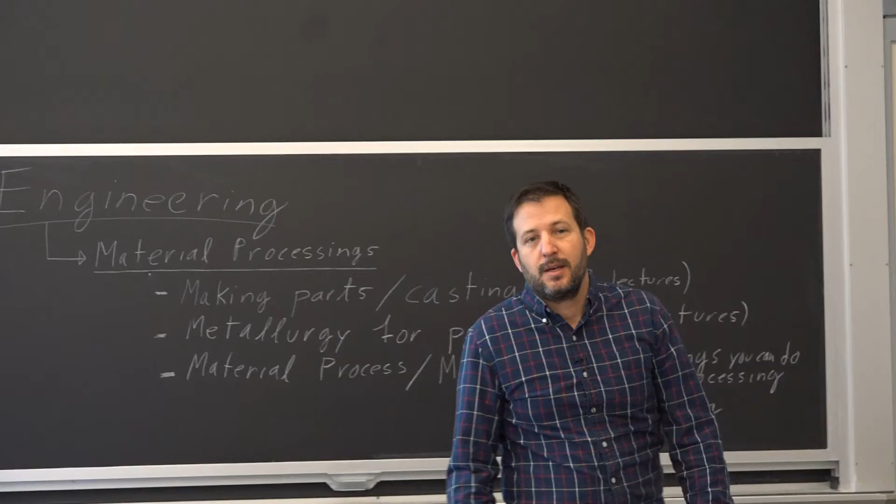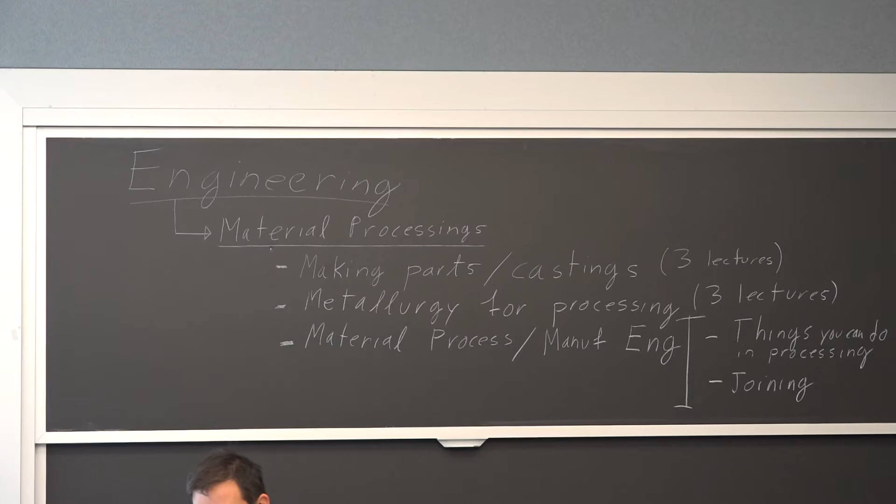I figured I'll give you a little bit more of an outline of what I'm hoping to do with you guys this semester. Of course, it's the engineering school of MIT, so we'll talk about engineering. The specific purpose of my 12-hour module is to give you a good sense of materials processing. I think I started at a relatively basic level, saying, you know, you have these wrought products, you have these castings.

I mentioned extrusion. I didn't want to get too much into it. And then I started walking in. Last time you guys saw the press for doing a die casting, and we started getting really into some of the details. I showed you those dendrites and all sorts of things.

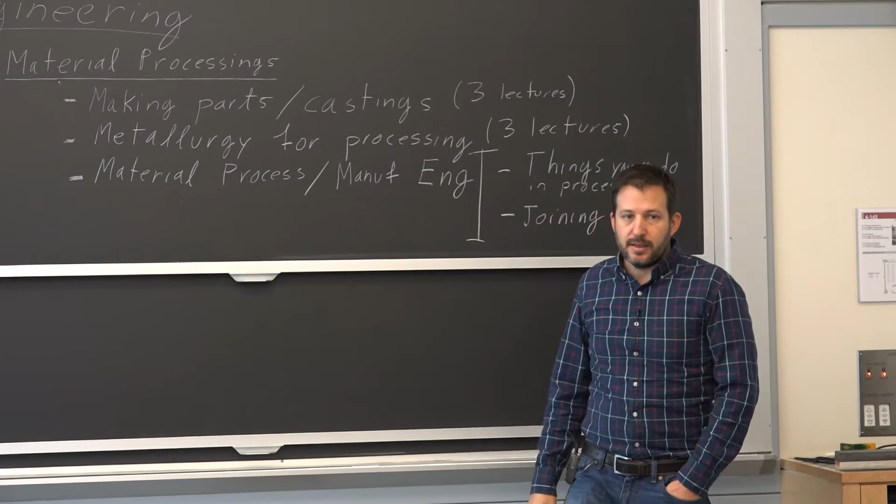So what I was hoping to do just before we get too far here is I want you guys to really understand how we make parts and why we do it this way. I will finish up today essentially on castings, and that's going to include plastics.

I got some relatively complex plastic part that we're going to go over. Some of it is going to relate a little bit more to engineering than real polymer engineering or polymer processing. But I think, from my understanding over time, that's the right level for this class.

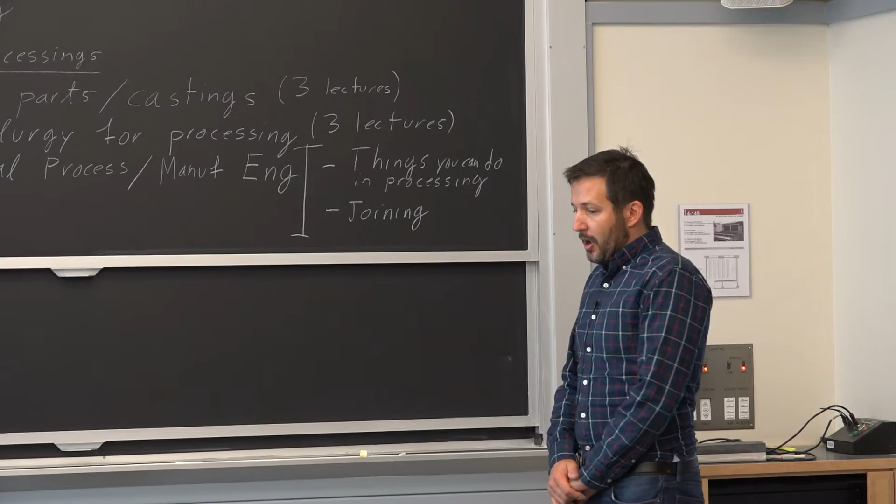I do warn you that the upcoming three lectures, you guys are going to have to go through. For me, it was two years of undergrad, but I will not make it any more terrible than what I did with making parts. So what we're going to do is we will talk about grains.

That was something that came out. I had a big meeting yesterday in Tulsa with a lot of people, and there was this engineer, significantly older than me, another expert on metallurgy, and whenever somebody would ask him a question, he'd throw the word molecule. There's just no need for it, because of course it blows everybody's mind off. If you look at business people, they've heard the word molecule, but they really don't want to know anything about it. If you say grains, a lot of times they don't mind.

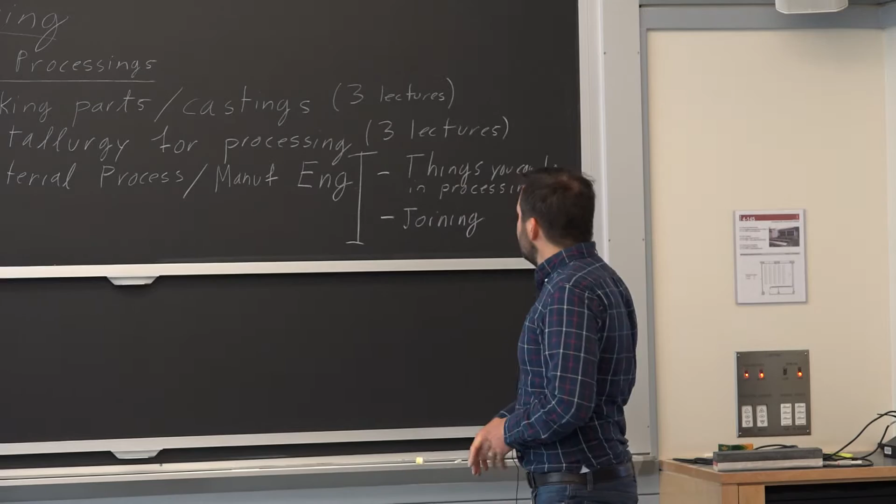If you've got a sand pile, it's got grains of sand. It makes sense, you know? So I'm going to try to go through that process with you in terms of metallurgy. And when you feel like, oh, this is a little too much, just tell me, ask questions. That's the way that we've been working already. So I'm very confident that both you and I are going to go through this successfully.

And then we'll talk more about other things. Like there was a word last class about, oh, can we make parts out of the powder? These laser sintering and stuff like that. Well, my personal point of view is I'd like you guys to be able to walk, just like my twins, before you start running and talking about really, really advanced technological development. So that's a little bit my approach. I guess it's how I do things.

So we'll talk more about how you can make a surface treatment, you can add a coating for corrosion protection. There's so many things you can do as part of processing. So you start with something that's just steel, and then it becomes something else. Joining, I mentioned it in the first class, is something very, very important.

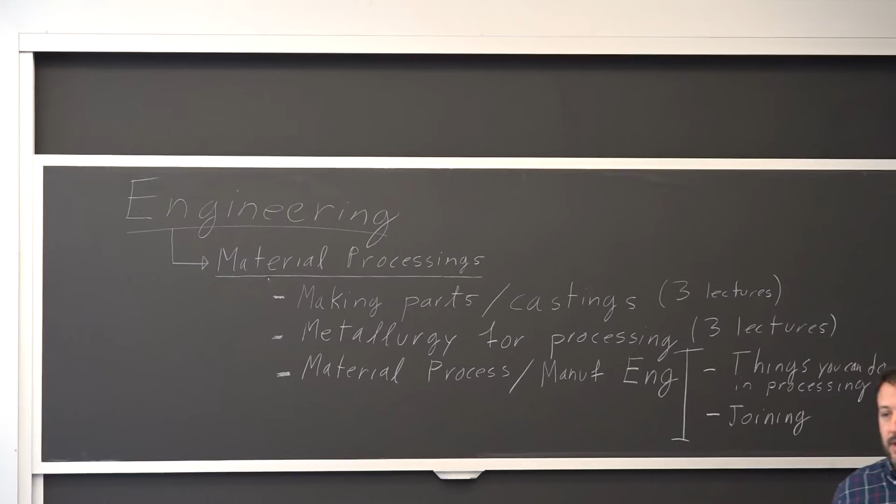I have just a very first good case study on that, two case studies on that today that I want to introduce. So the reason I'm bringing it down, and I'm going to keep that in my mind, and I'm going to keep you in mind as well, is when you start putting together your notes, you can decide to follow this outline. You don't have to keep it all as a flow, because there are topics, is what I'm saying.

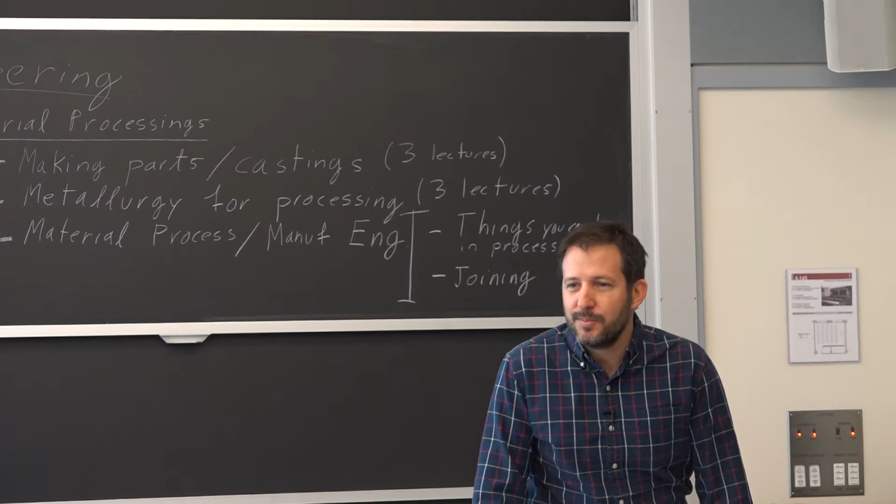Now, there is one thing I want to say: I made reference to Professor Eagar's module, but I did not realize how much he's changing it for you guys. So when I said, as you heard from Professor Eagar, we use a lot of steel as opposed to concrete and all that, well, he's going to get to it later with you guys this semester. So he just changed a little bit his module. The first three or four hours are really, really nice overviews.

But I don't know how far you guys are going to be able to get in the 12 hours into the details of material selection, because what used to be the first 4 hours now, as I understand it, is going to be lecture 5 to 7 or 8, maybe up to 12, because he has tremendous experience and he's an engineer, scientist, professor, everything. So you guys are lucky. I want to take his class one more time, but I can't do it this semester. So you guys can tell me a little bit about it, maybe in your questions.

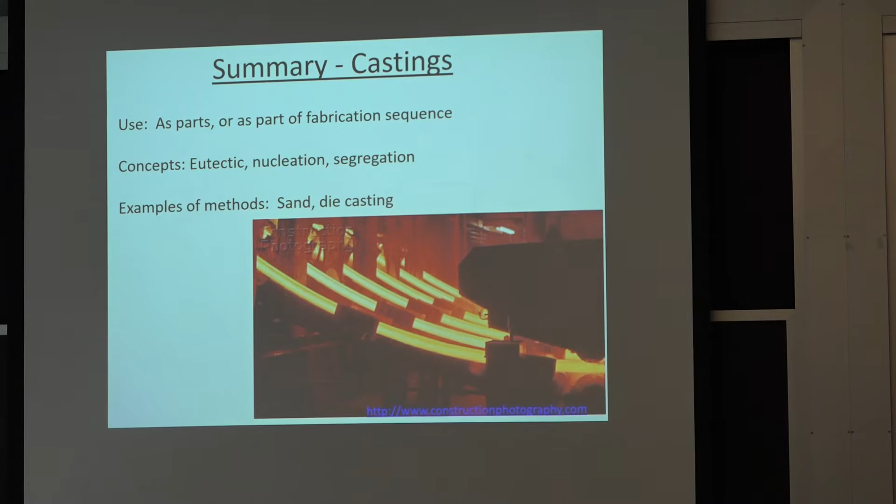Okay, so having said all that, let's get started. Last time we talked about steel being really, really hot, coming from the melt, making these big billets. You're refining the chemistry of the alloy, adjusting all these alloying elements to have the best phase diagram you want, then you cast it, and you get this very complex structure. We talked a little bit about the nucleation of these grains when you solidify - you can make single crystals, but it's a lot harder than just having polycrystals.

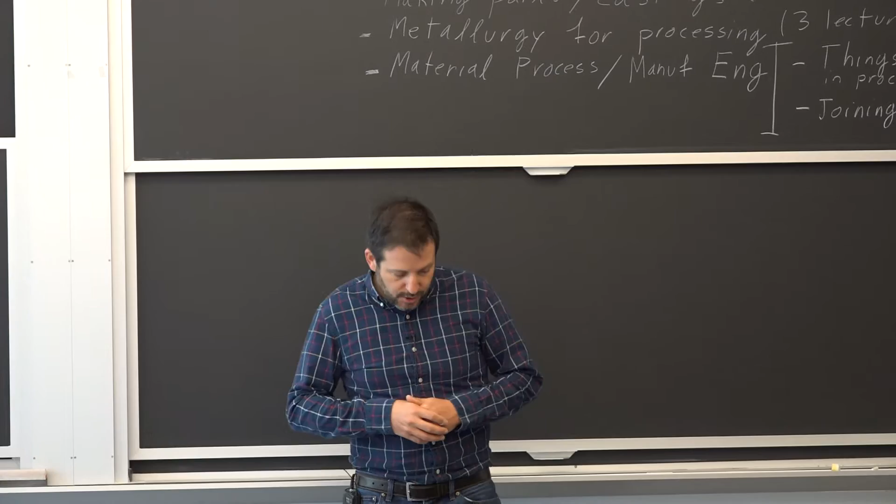And then we talked about segregation, chemical segregation - that's the pushing of the alloying elements towards the center of the billet when you make it. I talked about sand casting, die casting. I gave you guys the example of making jewelry out of platinum.

So we're going to finish up a little bit some of those examples today, and go a little bit deeper on the casting fundamentals. It's a graduate school class, right? So we will go a little bit more into the chemistry and physics.

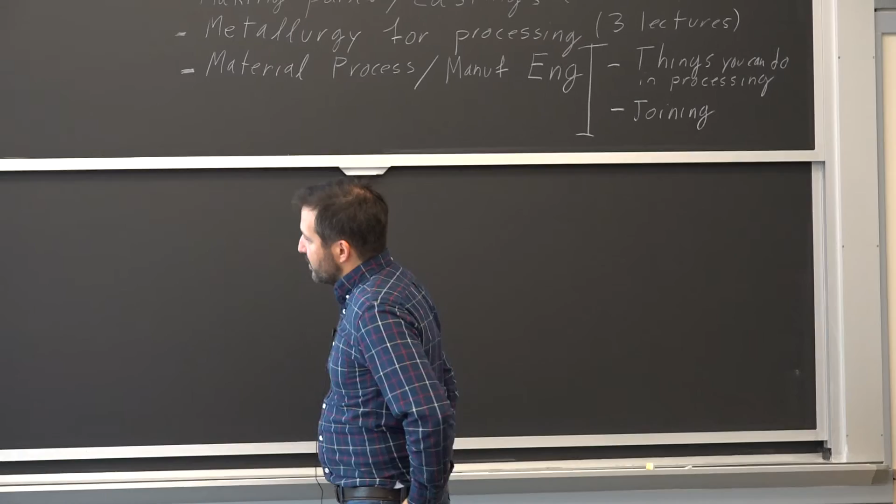The material deformation is actually going to be next time. So I changed the slides, but this outline here, we're not going to get to the third bullet, although we will talk about plastics - I have some very specific examples. This one is probably not going to run easily, so let's see. I think it's very useful, and I'll explain why we're doing this.

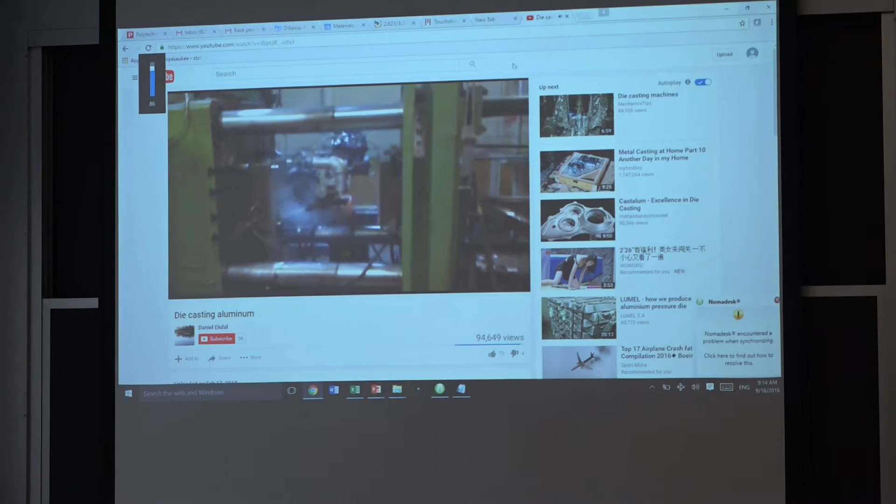We talked about this melt of metal being really hot. Even boiling water is kind of hot, right? That's 100 degrees. So if you think about aluminum at 600 degrees, you don't want to put your hand into it, and you can probably agree with me. It's a different process - they always clean those molds when they're going to do a die casting. And there's always a layer of oxidation from the molten metal.

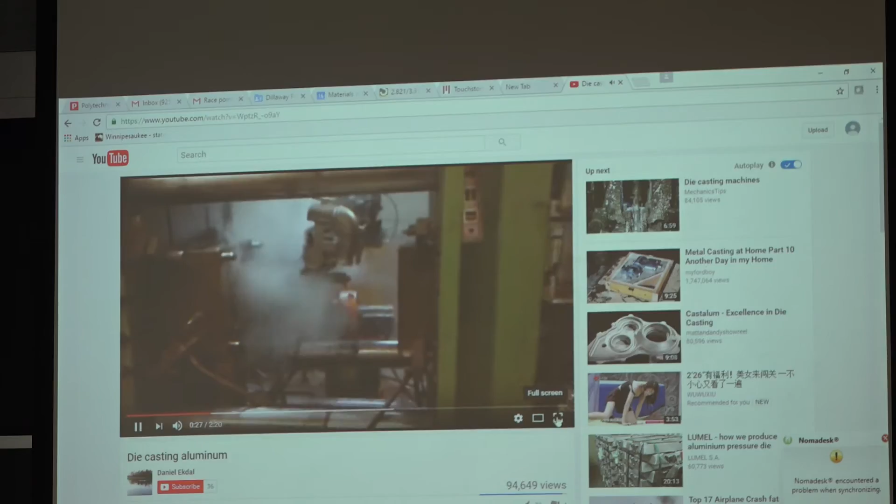And I know there was this very specific question you guys had about why don't we do it in vacuum? Well, I think we can all agree that this equipment, if it has to operate under a controlled atmosphere of vacuum, it's going to be a lot more expensive - like an electron microscope. Yeah, so it's hot.

So when it's pouring, you don't want to be there. I've been there, I've seen some stuff blow, and we'll go over that. It just burns through stuff at that kind of temperature, especially for steel. You can see here they're making this - there's a piston coming out to make the inside of this. So it casts and then it's pulling out, and that's how you make a lot of car components in large volume. Die castings are very typical for the housing of a pump and things like that. So here comes your aluminum, just the way it is.

You didn't think it was this way, right? Yeah, I knew it.

That may be all the excitement there is here, but there's a reaction going on. We know that aluminum has a very strong tendency to oxidize. So when you pick it up, it makes this little layer of oxide on top of the pool, but when you pour it, you expose new material, and that's how you get the flame.

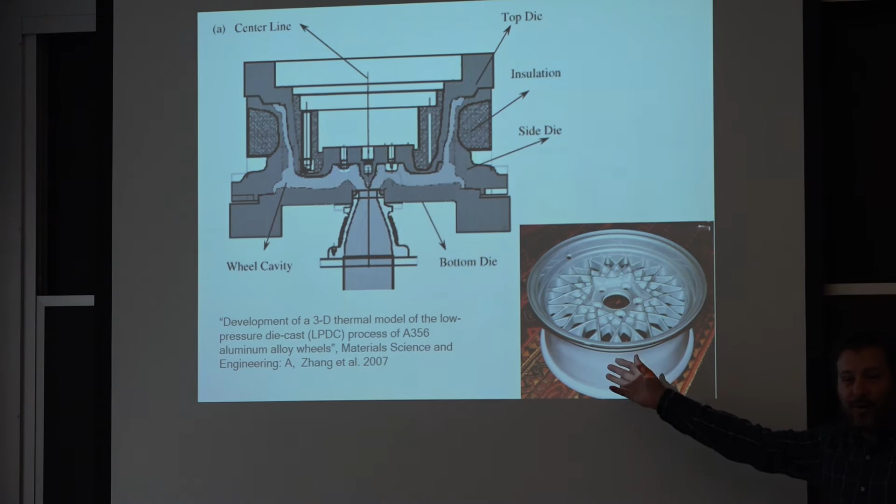So I did mention that, but I didn't show it last time, as far as making wheels out of this. Excellent. All done at once. And it can be good looking too. You have to go through a very special polishing process if it's made out of aluminum and you want it to look like a lot of those do these days.

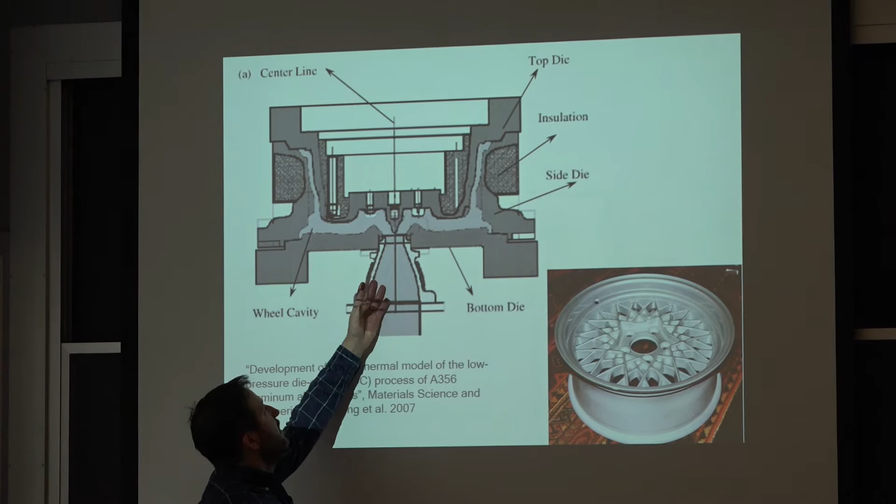So in this specific case, the liquid aluminum alloy comes from the underside and fills all around at the same time. There's a lot of different parts to that mold. We have the underside, a side here, and then a top. It's actually not that bad. But all the engineering associated with cooling to make this is so important, because you want to be sure you always fill your mold all the way to the end, and wherever the last metal solidifies is where you're going to have porosity.

So you don't want that to be an area of high stress. Some of the geometry here is not just for the look, but also for the processing. If you're going to make a component like this, there are shapes you just can't do. So it becomes part of your overall design as a mechanical engineer to talk to the shop about what they can and cannot do.

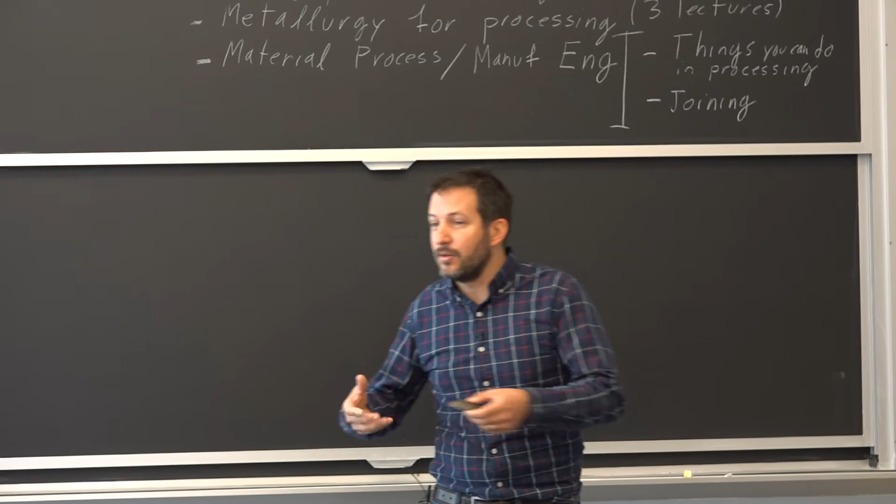The first class, I talked about making something like a natural gas plumbing system. It goes into your home and feeds all the appliances. The last thing you want is a complete pullout of a joint, because that means a big stream of natural gas all of a sudden filling up the house. That's not acceptable. So if you're not going to have somebody doing the welding, somebody coming for the inspection of that welding, and using very sophisticated industrial processes, then you ask for fittings that are threaded, like this one.

If you take the material of the casting and make it malleable or ductile iron, it means it will deform before it breaks. You do the same with these threads, so if your connection was not put on correctly, or something happened, some settlement, some forces from the outside, the freezing cycle, you get a small leak. We have detectors, we smell it, and we know something is going on. But the last thing you want is this thing to have a brittle failure. So it comes down to experience and understanding the consequences of a failure when deciding if this is the way to go or not.

Is it the easiest way? No. This is terrible for a plumber, because with all these threads, when you have one pipe and try to put the fitting, you have to get it at the right location, and then thread in the other one. Once it's done, you can't take it off. So you have to build your plumbing system from one side to the other. They would rather come with some torches and do other things, but it's not as safe. So this is the building code. Another example that relates to how we select things.

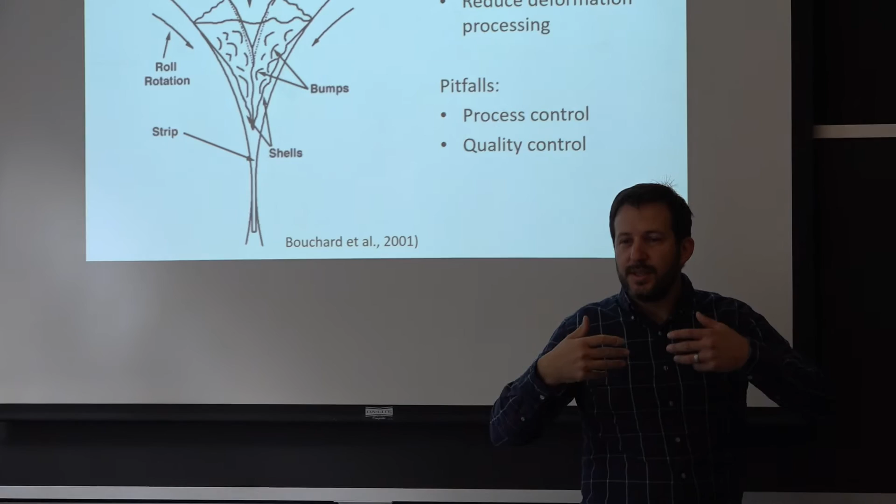You can probably see here what happens: these rolls have to be fairly cold, so you completely solidify the shell when it's coming out of here. That means when it's touching the metal, it's cooling the metal quickly, and that means you need to keep feeding that little pool at a certain feed rate that's pretty high. It will come out of here maybe a foot or two a second. So the filling of that pool with the liquid metal has to be so steady and so controlled, so you don't have variation in that pool sitting there.

So a lot of process optimization is needed to make those things work, and they're easier with certain materials than others. For aluminum, this process is easy because of the cooler temperature. I did some research 12 years ago on using it for copper, and copper is around 1200 degrees centigrade, so it was a lot harder. Getting this to work with steel requires even higher temperature, so it's even more work. That's just the way it is.

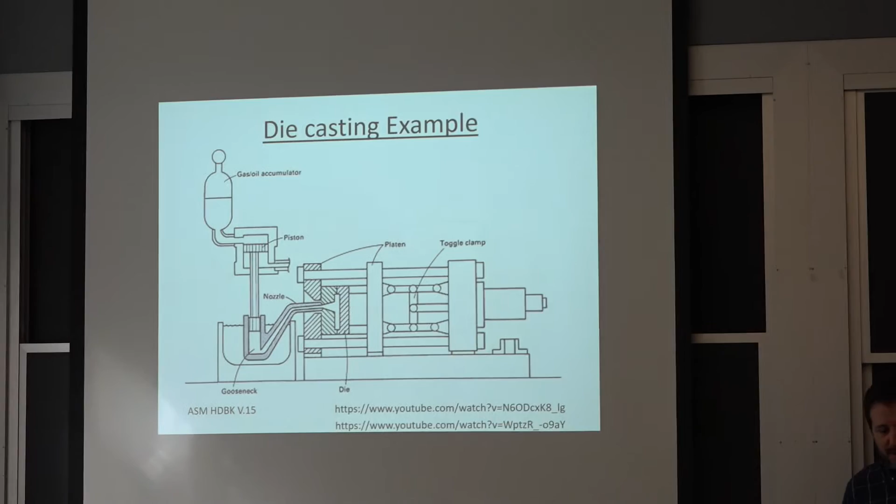The same with die casting - I gave you plenty of examples now of aluminum. Well, it's not done with steel. Is it going to be done one day? Probably, but at this point, if you can't make it out of an aluminum alloy, well, you'd like to get it out of plastic, and that's what we're going to finish the class with today, because it's very, very effective.

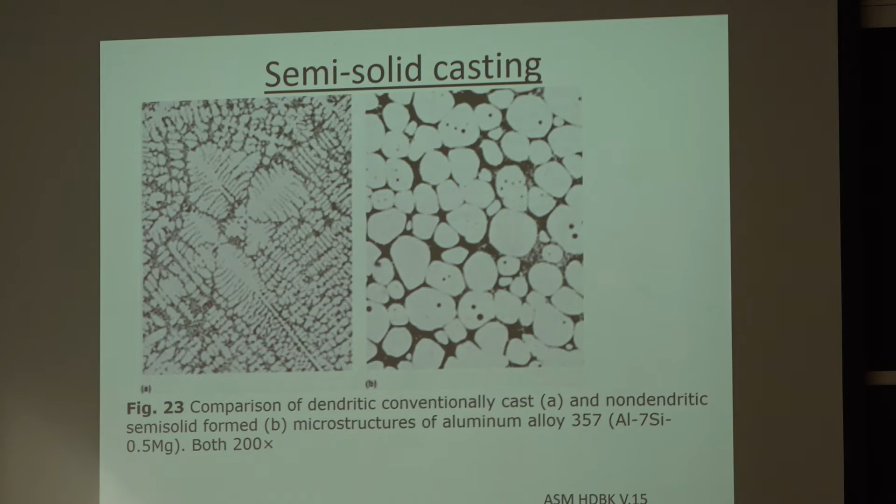With aluminum, sometimes you have distortion, and I mentioned this, but I'm going to throw it up as an image. If your feedstock for the die casting of aluminum contains some solids to begin with, you're going to have a more homogeneous microstructure through the thickness, and it's a process that's a lot easier to control. The other case, the traditional way, you get this cross-section of those dendrites that we looked at together.

Okay, so going a little bit more into what happens during solidification. This is a simple textbook - the first one, Porter and Easterling. There is a more sophisticated version for the course 3 people, one of the first-year classes, Kinetics of Materials. It has a lot more random walk theory and things that are useful, but at the same time it takes more time to get the concepts right.

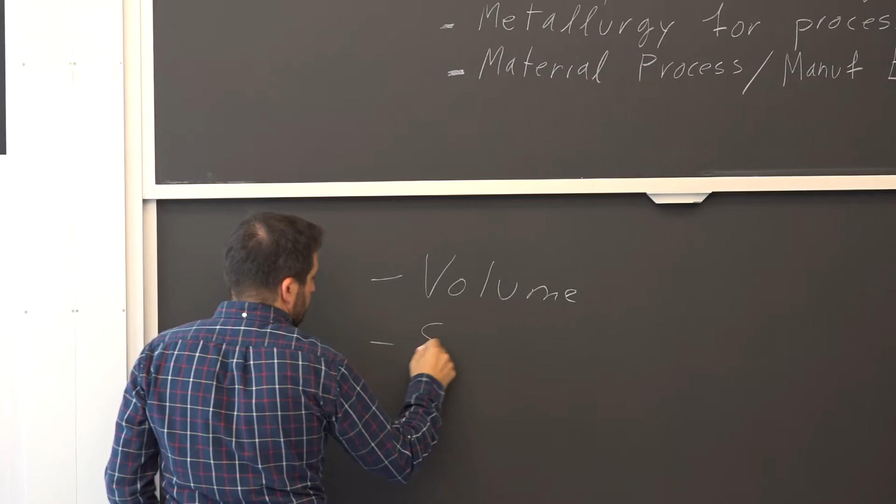So the concepts: you have a liquid and you want to go through a phase transformation. That sounds really nice, but what it means is all of a sudden you're going to create an interface. So if you think about your energy, you have two aspects to this: you have the volume energy, and then you have a surface energy. Some others may think of this in a more complex way, but that's all I can think of.

The liquid would like to become a solid - let's say it's a dendrite of aluminum. But in going through that process, in lowering your volume energy, your surface energy is going up because now you have an interface between a solid and a liquid. So what happens for a lot of phase transformations is there is a critical size where this does balance out, and I'm showing it graphically here.

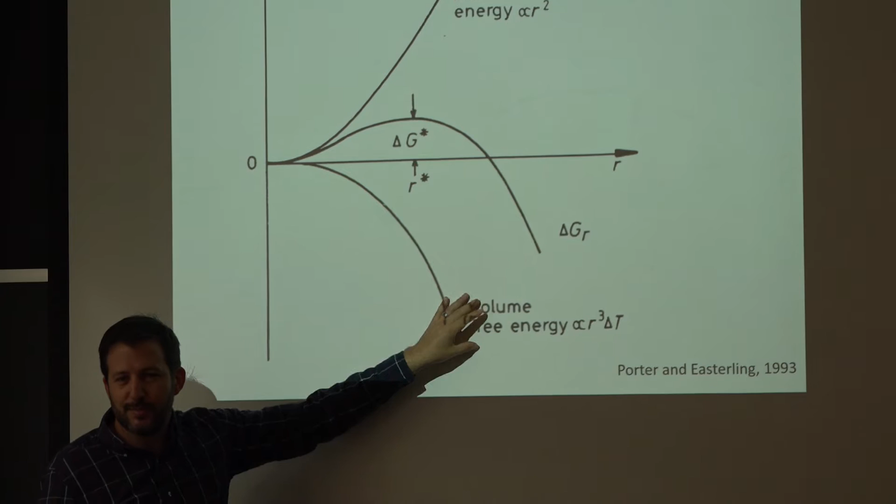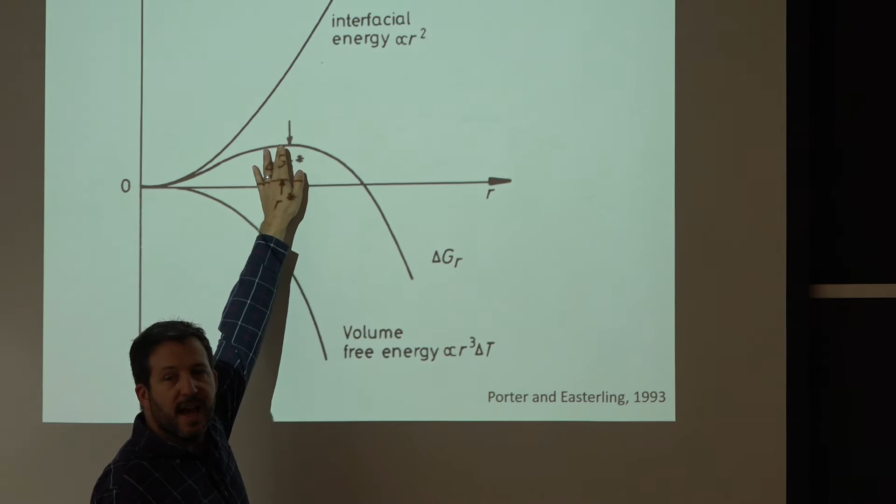So delta G is the entire energy - it's a combination of, if you were to transform to make a sphere, as a function of sphere radius, you are reducing your volume energy. We can all understand that because the phase diagram tells us the transformation happens. Now, I'm also creating that interface between the liquid and the solid. So when you add it up, you see that your total free energy is going up until a certain point, and after that it's going back down. So all transformations work this way.

So when we're going to talk about aging of aluminum, it's the same thing - you have to be in a condition where, by random walk vibration, you can get over that hump.

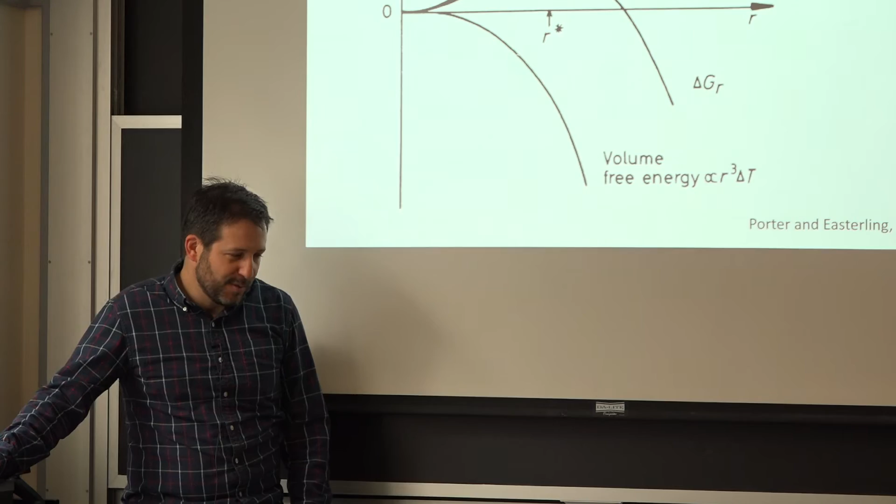What's another way to make sure you get over that hump? The best way is to wait. Things just bounce back and forth. If you're playing anything with balls, eventually it's going to fall to the ground. It's just a question of time. If it's ping pong or anything like that, eventually it will follow gravity.

Not right away, but it's the same here. So let's say I want to make an aluminum casting that has a very, very fine microstructure. What I'm trying to do, I could do two things. I could keep the temperature just below the fusion point, and then it's going to take a while before something starts to form, and then that thing that forms is going to grow very quickly. That's very typical. If I lower the temperature, I get these little nuclei that form very quickly, but then they take more time to grow, and that gives me a better microstructure. So one basic reason we'd like to cool things relatively quickly is to form more grains, essentially, and have a more homogeneous microstructure.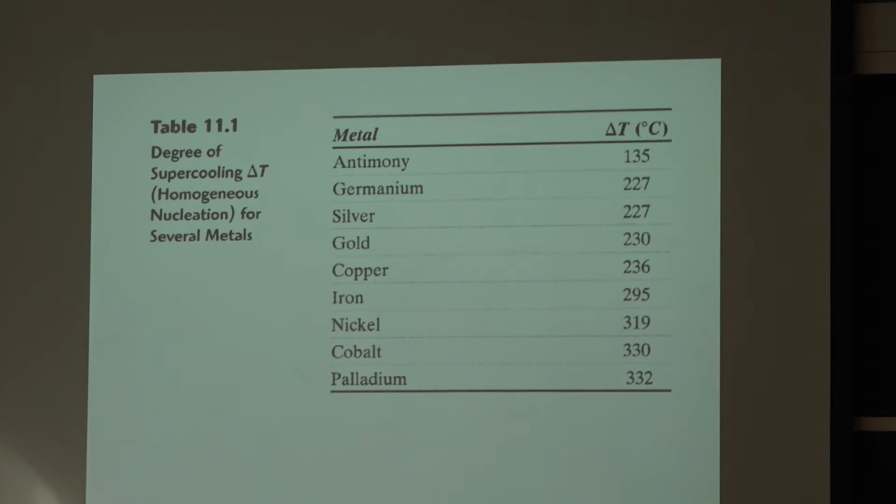And part of that is this kinetic effect. Now, this is really a theory to some extent, especially for metals, because if you don't have a little bit of an interface to begin with—say you try to get a little solid of silver into a huge vat of silver—this table tells you here you're going to be 200 degrees below the melting point of silver before you start having a solid. And at that point, it's not hot enough. It may not even happen. So we call that supercooling, and I guess it's to emphasize how significant the surface energy is.

So what happens? For metal, it starts from the mold. The reason is when you have your pool of liquid metal, there's always an interface already between the liquid and the mold. That's high energy to begin with. So when you start to nucleate there, you're replacing a liquid-to-solid interface with a solid-to-solid interface. That's great. It's the same reason you get snow ice formation on the window as opposed to cubes of ice out of the air—there's a site for nucleation on the mold.

It's extremely important for metals, not so much for plastics. And I decided to go on and talk a little bit about this, and when I do, you guys can ask any question because I know about it a lot. If you're not interested, that's fine. But somebody asked me, what the hell is this, last time? So it's an experiment that didn't work the way it was supposed to.

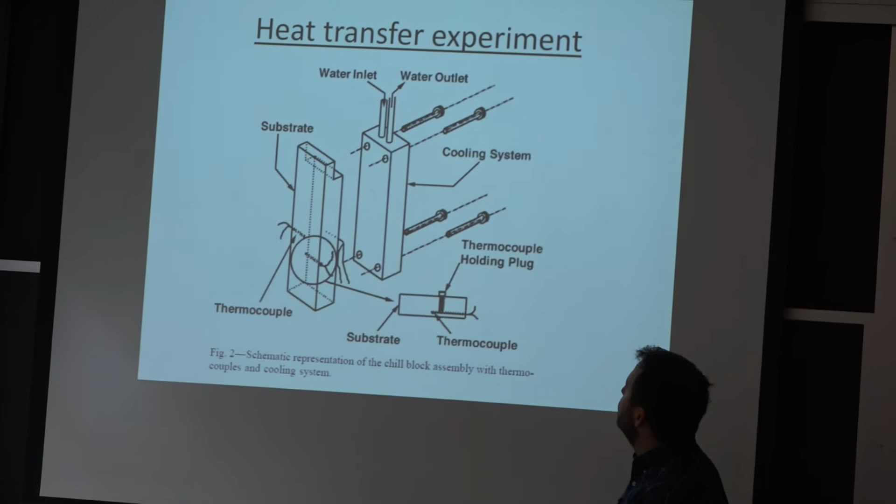So it's a leftover of this system here, where you have a block with an inlet and an outlet tube to do an experiment—how are we going to do this here? Okay, yeah, this is all closed. There's more complexity here than you probably want to see. But the basic idea is to study solidification and the effect of the mold characteristics.

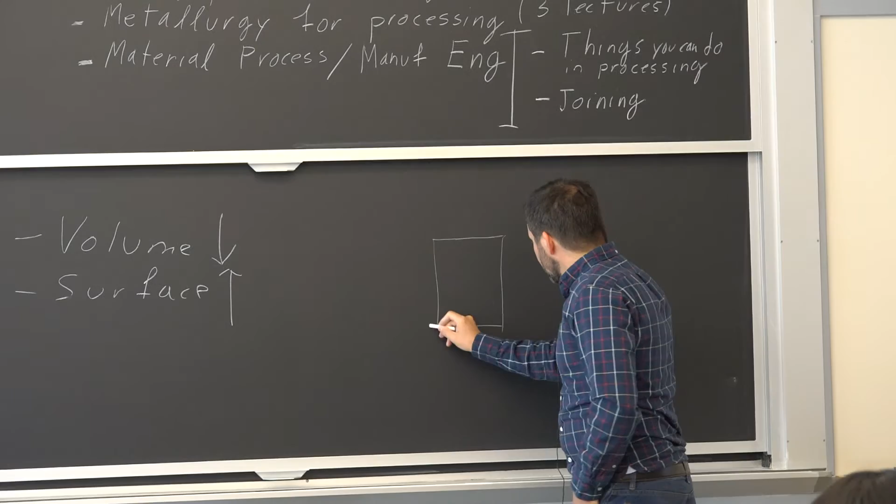I had to build this fixture where essentially you expose the surface of the metal with the mold. So the mold just looked like this on one side, with protection on the edges, and that was just a big box. Behind it, you have these spots where you keep track of temperature, so you get the temperature over time to know what happens. So let's say you get that box—it's all insulated all around, it's got a cooling system to it, then it has a surface. You lower it into the melt. And it's very close to that strip caster we talked about, with the two wheels coming down.

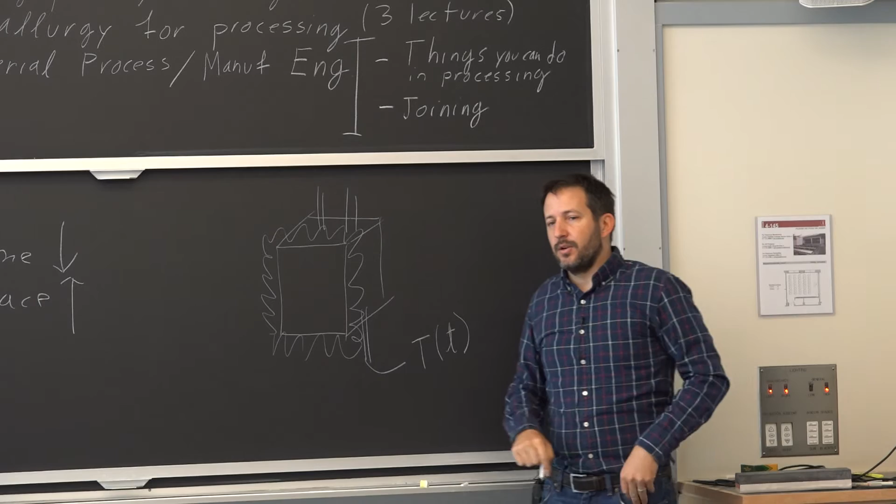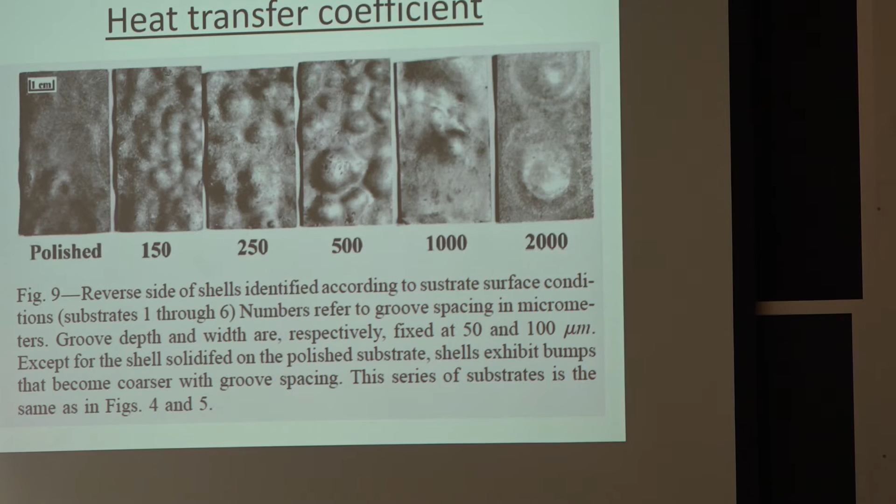So we're looking here at the piece, the strip of copper, and I'm sorry I couldn't keep any of them. The piece of copper that built over this substrate or mold surface or roller surface, for the analogy to the strip caster. And you can probably see these little deposits or castings have a different surface morphology. So we're looking at about 2-3 inches in size.

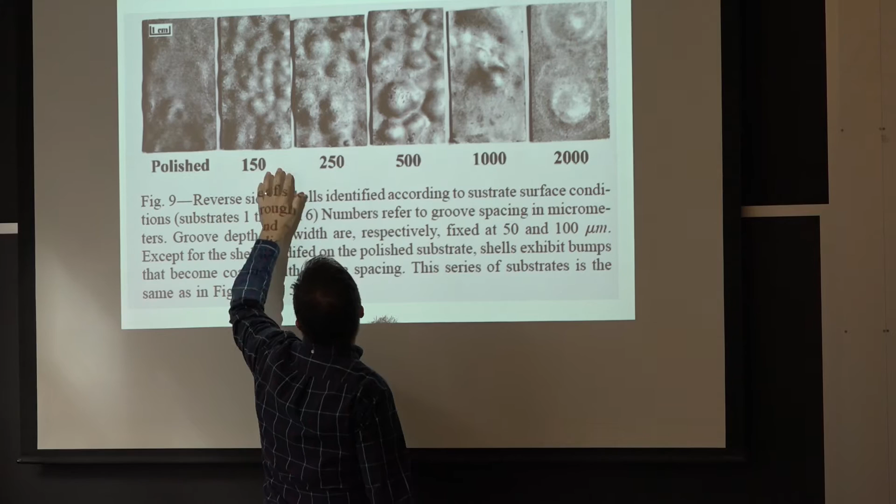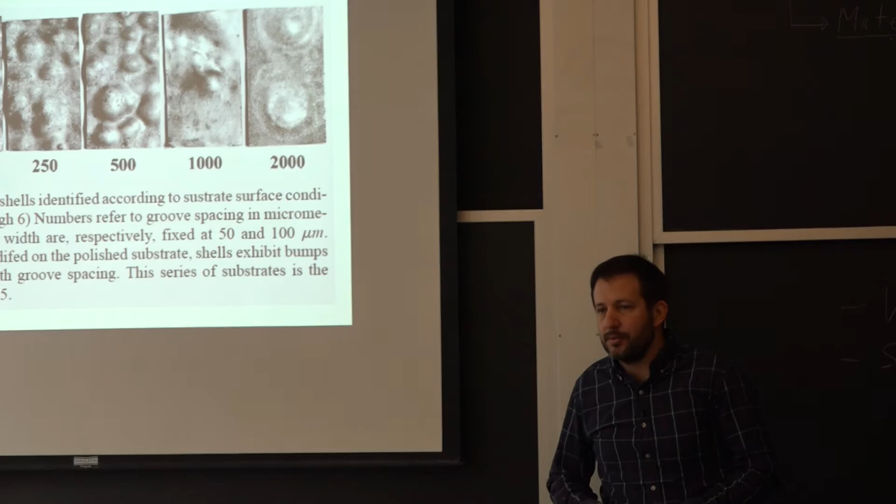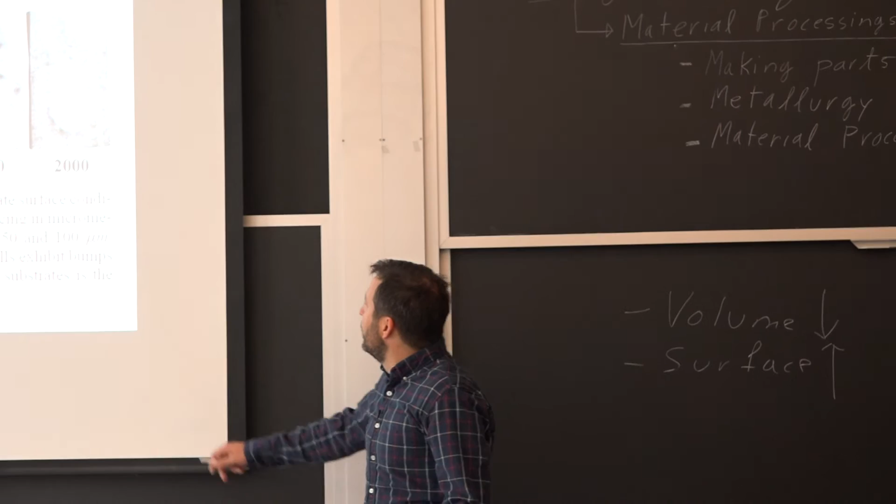So with a very, very fine polish, it was hard to have nucleation sites. So this one spot that I didn't do perfectly, or it was perfect, but it was still the only place that the first nuclei could start from, led to these 2 big bumps on the surface. So the significance of this research, it was actually significant. By the way, it wasn't all my ideas back then. I was the doer. Just to be clear, just like you guys sometimes.

So you have these 2 strips that are forming on each side of the strip caster where they meet. If it's a big bump against a big bump and all that, it's not going to work. It's going to give you a terrible product. So what you have to do is use a very coarse grit of sandpaper to prepare the surface so you get plenty of nucleation sites. And your strip, yeah, it had a bunch of bumps, but they're all about the same and they're not that thick. So it's almost homogeneous. And yeah, that's the story.

Yes? So every single one of them are polished? They're prepared so you have a controlled condition, yes. I can't even remember the one. I don't know why polished ended up on this side, to tell you the truth. Apparently, maybe that's something they did after I finished my internship. They got somebody else that was a better polisher, and he was able not to get any bump on it. But it's not realistic, right?

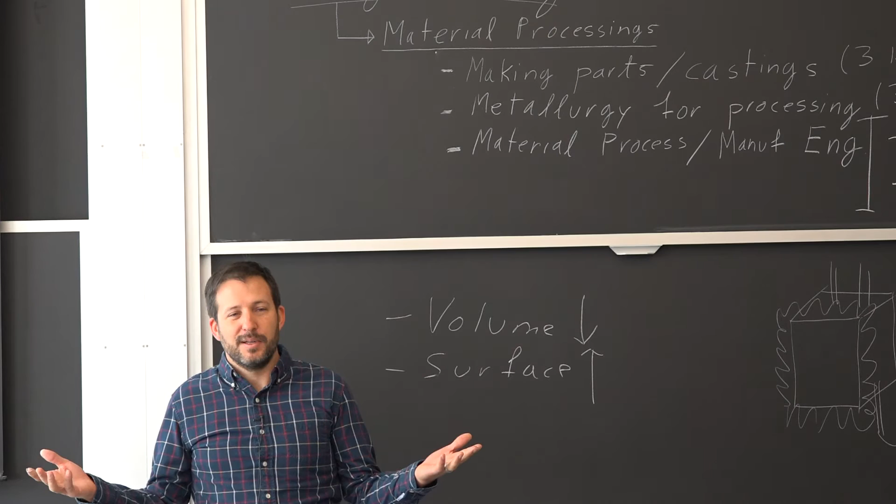If you get this industrial equipment, you can't say I'm going to suspension polish it so it looks just like a mirror all the time. So the best you can do is say it's going to be a fine finish. So yeah, so this one should be going all the way up here in terms of the evolution. But you can't do that. Yes? So what happened to the... Oh, it wasn't me. But very good question.

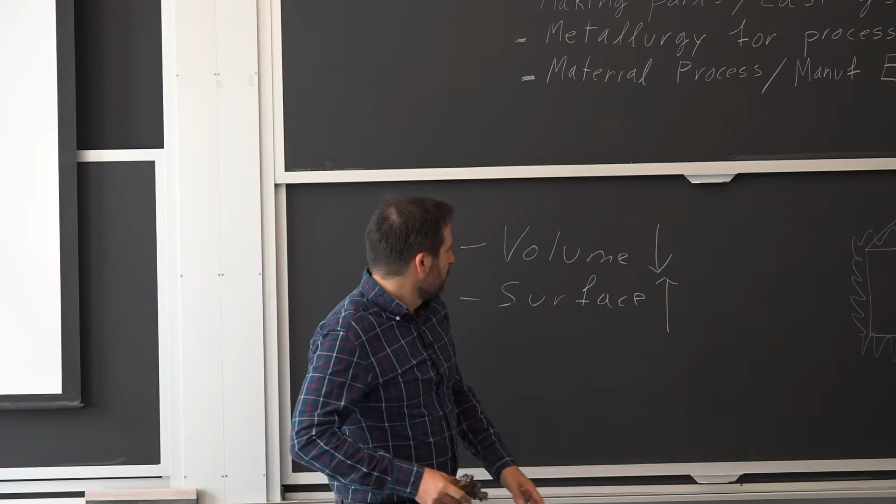To speak about safety, the guy that was the system control for lowering this thing into the melt and picking it up at a certain rate, certain time, and all that, he did an upgrade to the software. And we were in the middle of testing. Like we would test almost every morning at that point. You want to do it in the morning. It's physically intense to have all that gear on. You don't want to do that in the afternoon. It's just not safe.

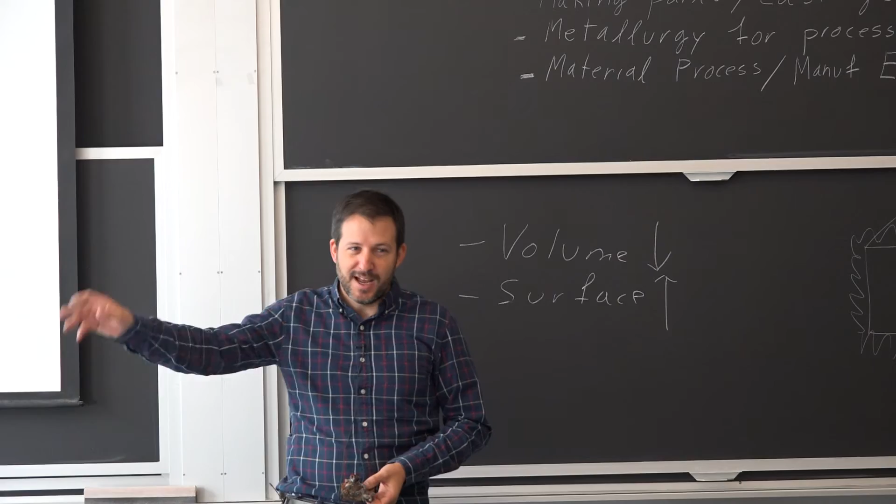So first thing in the morning, we'd show up there, get everything ready, and then he only told me after the test that he had done an upgrade to the software. It just went down an extra inch or so, and that's what happened. And then I was down for 2 weeks trying to remake the entire assembly. But we got it done.

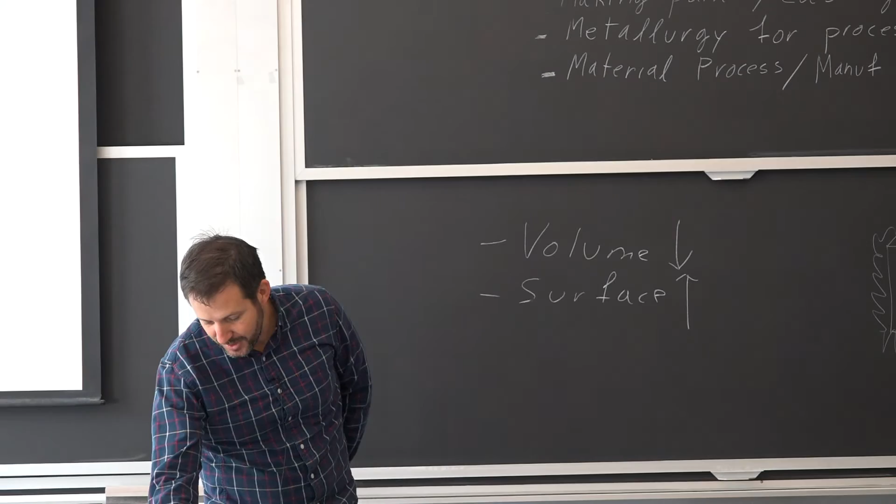So maybe the last thing associated with this discussion is safety is very important, and anything you do, you never know what's going to happen, especially in R&D, because we were very, very close to the end of the program, and now this happens, and then you got to start all over again. When you're doing these things at high temperature with a lot of variables, like how much stuff you put into the oven to melt it, and which alloy you use, and what's available, and is it really too moist today, because you can't have any moisture from the AC system going into that.

A lot of considerations, and so you're able to run, but you never know which day you're going to have to shut down for a couple of weeks. That's what I call R&D. You don't know. You hope you can continue generating good results. So some of the other results, I've talked about the thermocouple here. So keeping track of the temperature evolution was giving us our heat transfer coefficient.

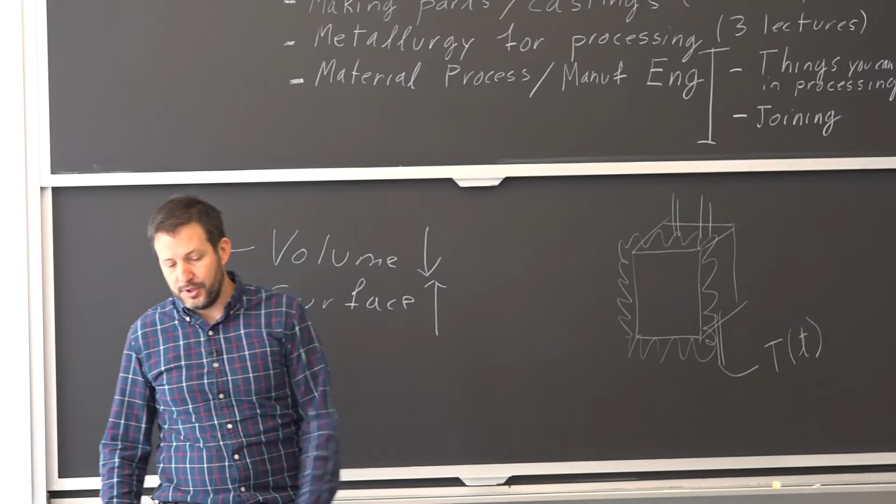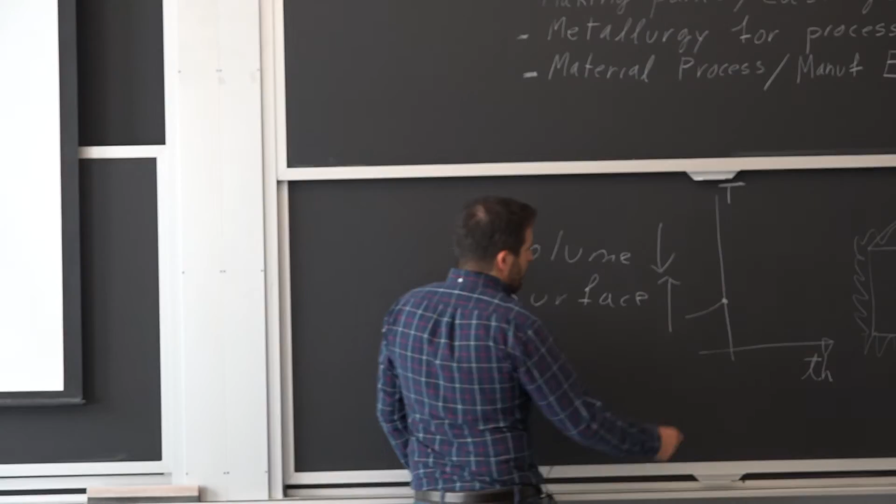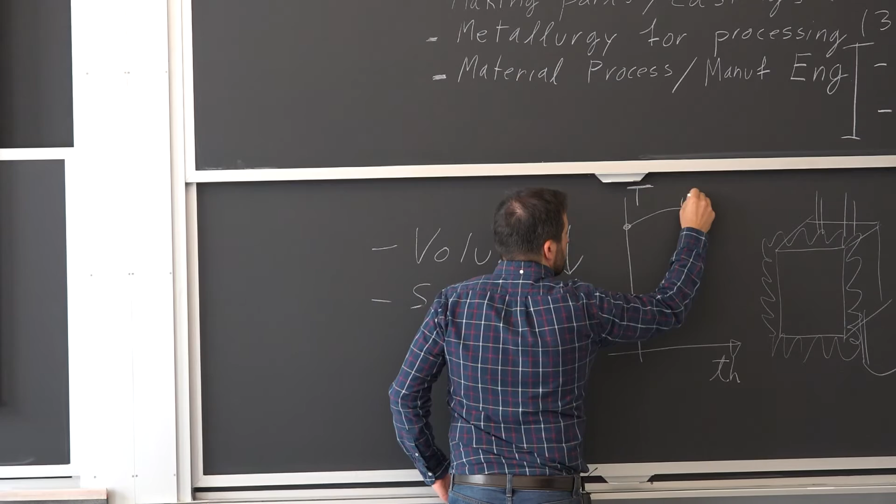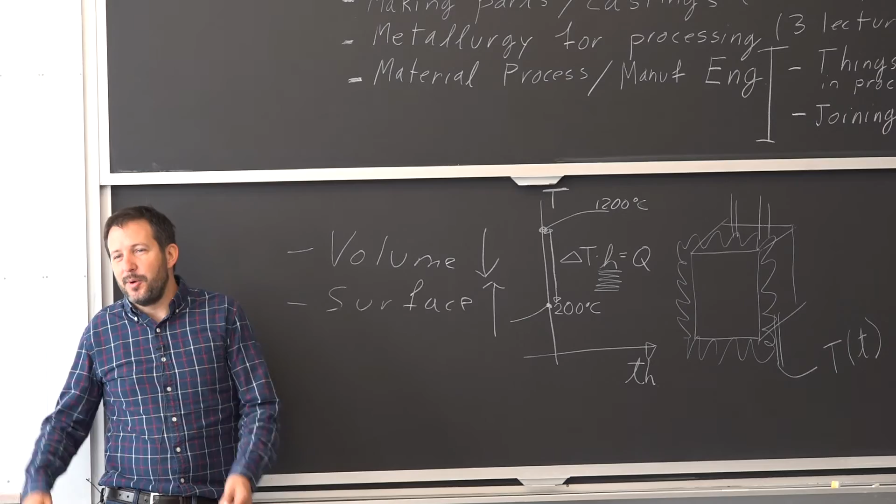I want you guys to understand that you have the liquid metal on the other side, that's 1200, and you have that big gap here, delta T, and then if you combine that with a certain constant, that's your heat transfer coefficient, it gives you the energy transfer across the mold interface. So the significance of this parameter for processing is money. If I can transfer the heat more quickly and safely and with a good quality product, I want to do that. Because even our die casting that I've showed you, you see it's closing. It takes a couple minutes. It's not like a press that goes and makes little nuts and bolts very, very quickly.

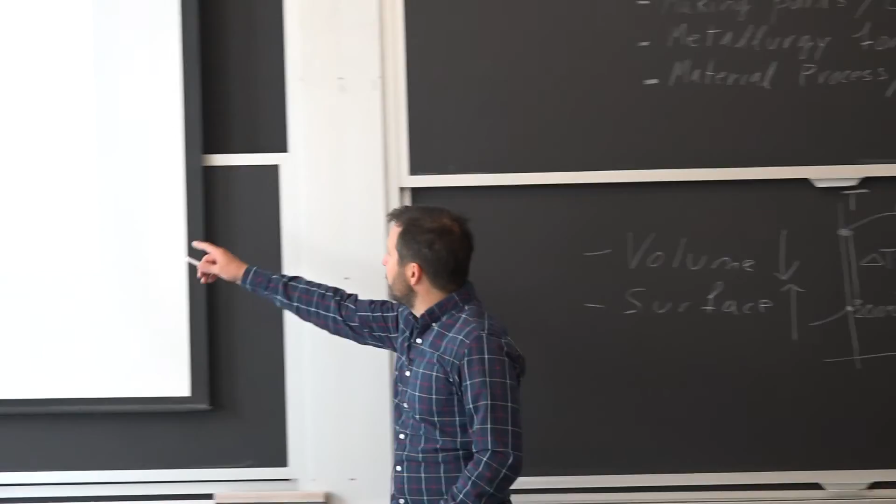So the two things that we've talked about so far for casting is nucleation. And then here, this is a second concept, is you have to transfer the heat. When you start to solidify, you have to transfer the heat. And if you have these big bumps like this, I used the argument that I didn't want a bump to come against the other bump, but that's not the only reason why I don't want big bumps. If I have these big bumps, all of a sudden the shell that I'm creating is deforming physically. So you'll have a contact here where you started, and all the surrounding area is going to bow and not touch. And it reduces my heat transfer coefficient on the interface.

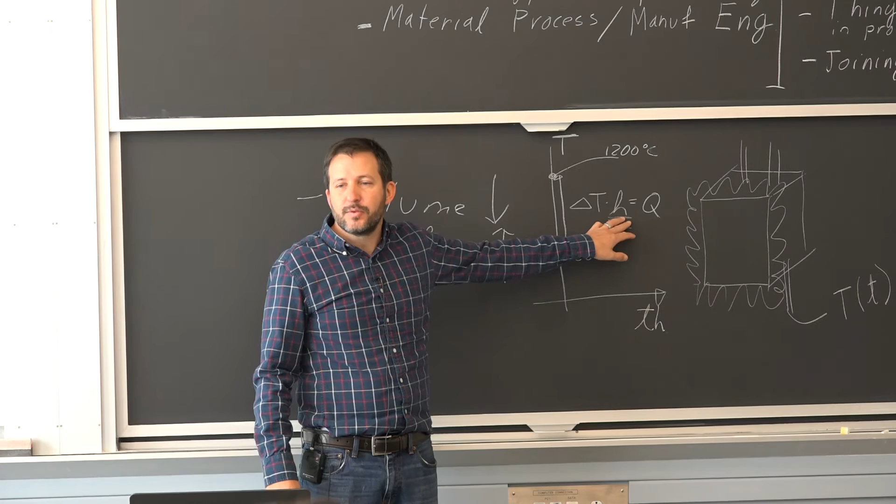So there's so many reasons why you really want to try to get a good contact between your metal and the mold and keep it regular. So in the case of die casting, the fact that you apply a pressure, just that itself helps you keep that contact constant. So if this shell is trying to rip off, there's a fluid pressure behind it that forces it to touch. It's one reason why pressure casting is a better process than just gravity casting. All right.

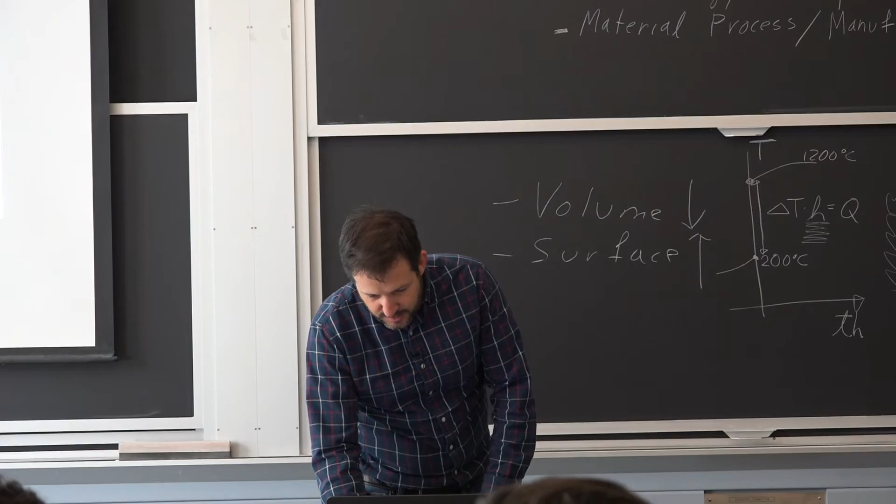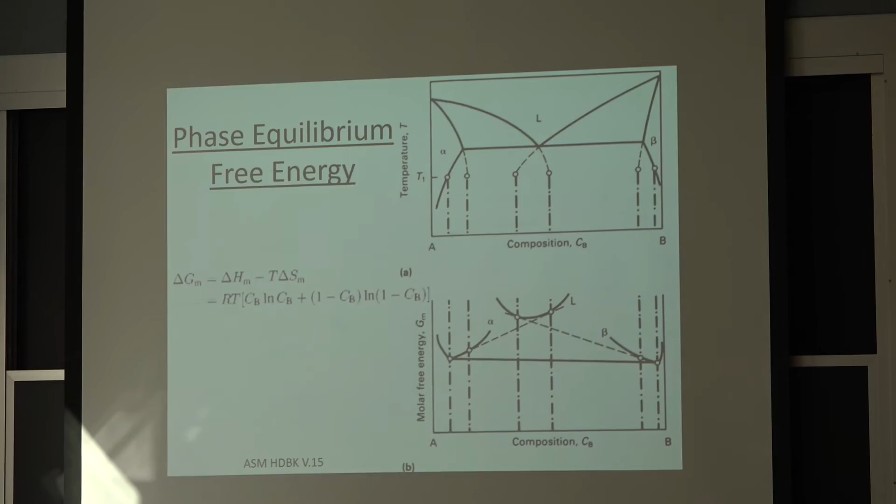So we want to avoid those, and we talked about the fact that we want alloys because it's a lower melting point here than it is to have the pure metal. I've also mentioned that it allows you to get very intricate into the microstructure. What I realized is this: if you were paying attention last time, you probably got how we make a phase diagram. If not, you can either go back or you can ask me about it, because I love phase diagrams. Thermodynamics was one of the things I was good at. I couldn't do it the way I used to, though, because I'm not using it as much. So thermodynamics in terms of metallurgy, for processing, we use it for heat treatment. So we're going to go to that later.

And we use it tremendously to control the quality of the steel that we use for casting. So what happens is, if you have a steel that has a lot of contamination in it, in this process prior to casting, you have a slag on top of that melt, and by the high temperature, the high energy, you can have a chemistry of that slag that is going to be like a sponge, and it's going to pick up those impurities you don't want and move them to that phase, and then you can toss it off after that.

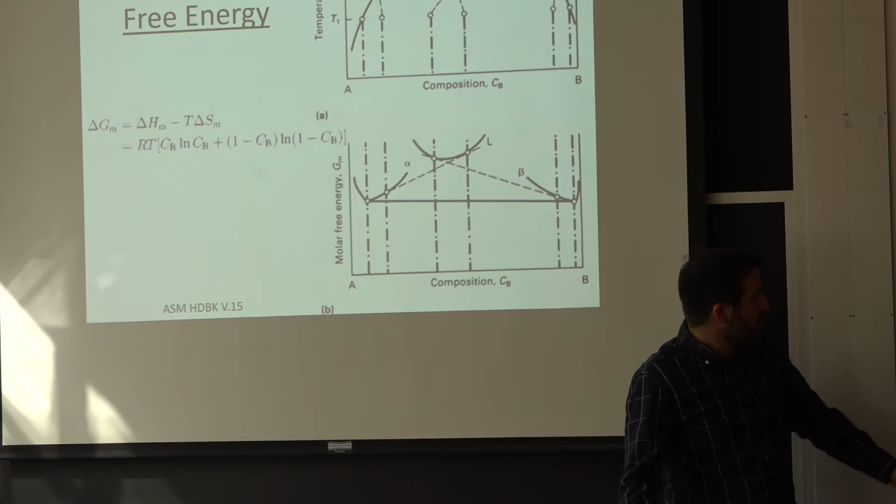So there's just a lot of thermodynamics used in metallurgy, but the basic concept is this free energy and trying to minimize it. And what we've talked about last time is, if I have a certain energy for a certain phase, another phase, this is without the interface. So this analysis here has no consideration of surface energy. This is just for the volume. It's how we determine this one. It tells me, well, I would rather have a certain fraction of this phase and a certain fraction of this phase, as opposed to having just one phase that has a higher average energy here for each of the two phases. That's how you minimize your volume total free energy.

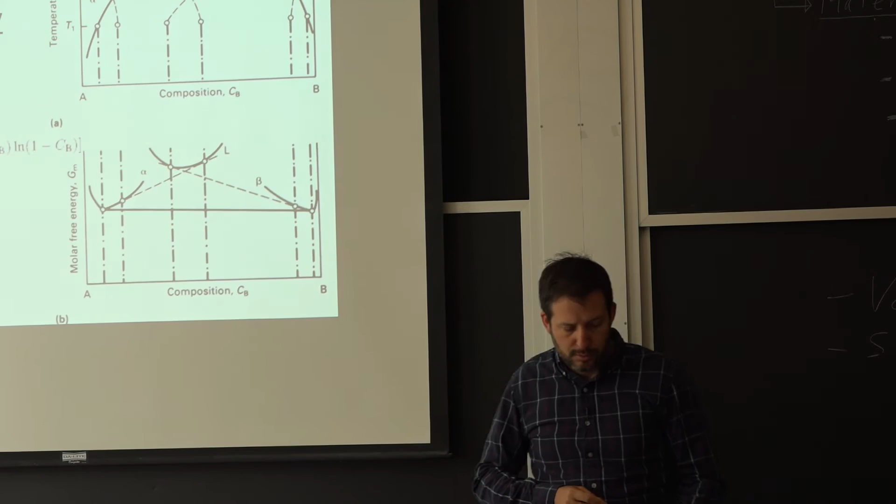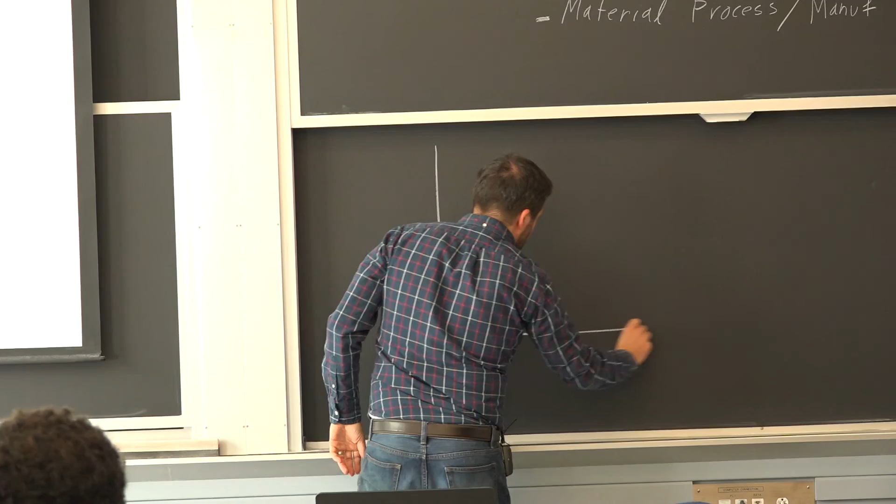A lot of phase diagrams end up looking like this, where the first thing to solidify, and I didn't bring any colors, I'll just draw it. So the first thing to solidify is going to be more rich on, say, iron here, if we say that's going to carbon. So what happens is, I have this pure iron that's going to solidify. The diagram's a little more complex, and this is my concentration.

I got these two lines because this is the stability. So let's say up to this point, and I got to stop it because this is very high temperature. It's not the equilibrium phase we have at ambient temperature. So this is alpha phase here. It only has one concentration, and this is the liquid.

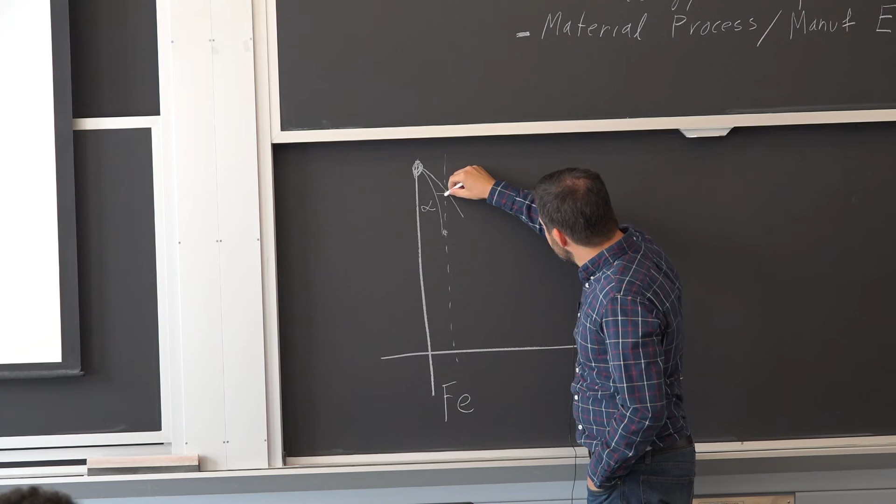So just the same way we were discussing it with the free energy, when I come to this point here and I want to make the alpha phase, then this alpha phase is going to have this concentration, so it's moving backward. And that's the reason why it's going to be pushing all the alloying element into the melt. Yes? Do you have a way to visualize different phases?

Which phase? Like just different phases. Like is it arrangement of atoms? Is that what you mean? Yeah, and I'll bring that. So essentially here it's completely random. It's amorphous or a glass geometry, and here it really is a crystal phase. And so to get that organization, let's say you have manganese in there and you have carbon, they don't really want to be in this crystal structure. They get pushed into the melt. It's a very good question.

So when you have that alpha phase you want to have here, and you have the other phase that you want to have below, what does that look like? Is it like there's a huge part that's alpha and a huge part that's the other, or is it all mixed together? Very good question. So the question is, what happens when you try to do this? It will be in two different ways.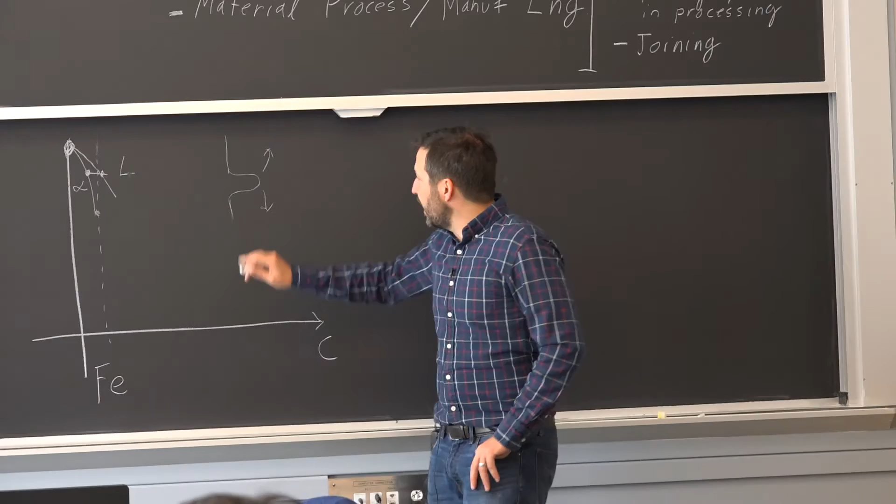So the first way, if this is our situation where it stays as a liquid and the other one is an alpha phase, what happens here is it will typically have these protrusions forming to push away the alloying elements, and you form these dendrites. So it's one grain into a liquid. And just like we discussed, you want to try to have as many of these as possible around your mold so it stays regular.

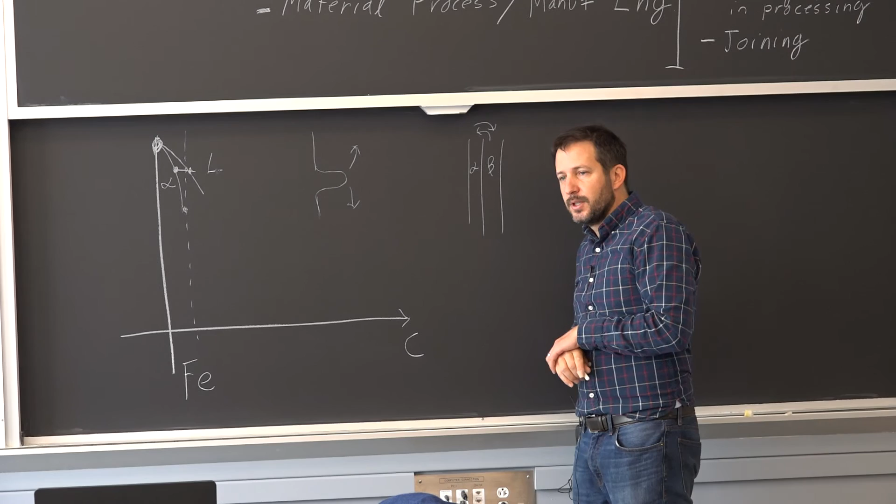If it is going to transform into two solids, then that's where you get more of your lamellar structure, where you have your alpha and say your beta, because up here they just do an exchange of what each other doesn't like, and they grow simultaneously together. And we see that a lot. That's our pearlite that we're going to go through. So that's a little bit what this explains here.

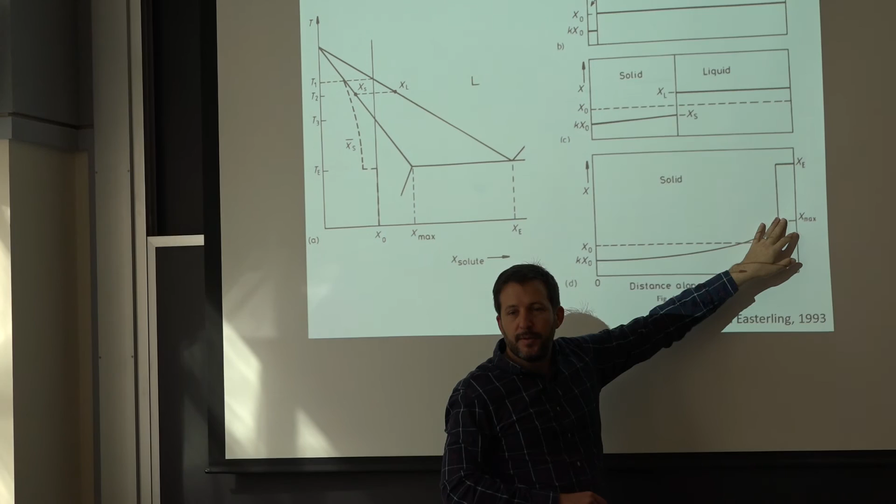Graphically, maybe a little better, where your first solid is going to have less alloying element and it's going into a liquid. So when you make your part, when you're done, the surface is going to be more pure than the very center. And one implication of that is you're going to need to be at high temperature and do all this hot rolling so you can get this gradient back to homogeneous if it's required for the application.

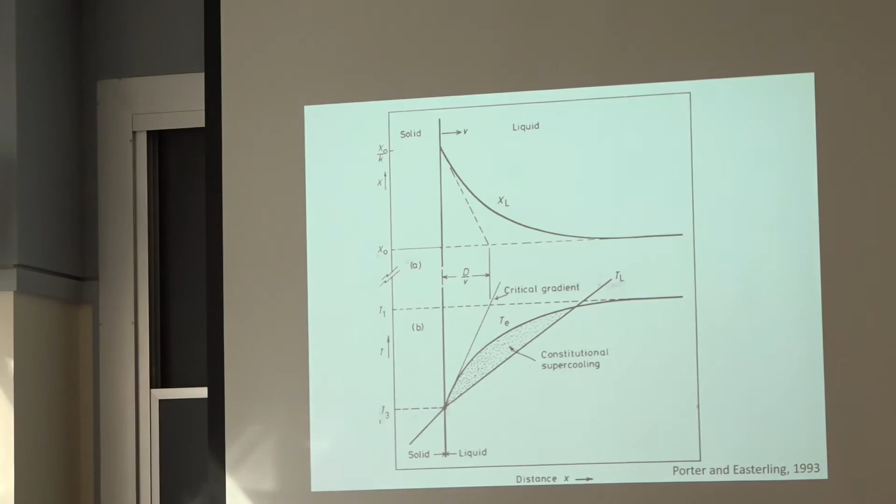This is a little bit more complex here, but it's how you would calculate to know if you're going to be forming big dendrites or not. So there's a critical rate at which it will happen or not, and I can't go to that. I'm going to get trapped in for 10 minutes or 20 minutes.

Yes? If you made a video of this happening and then you wanted to do the exact reverse thing by adding temperature, would it look exactly like playing the video backwards? Does it happen the same way if you just reverse? A very good question. So when you melt, we don't study that as much. I almost had to think about it.

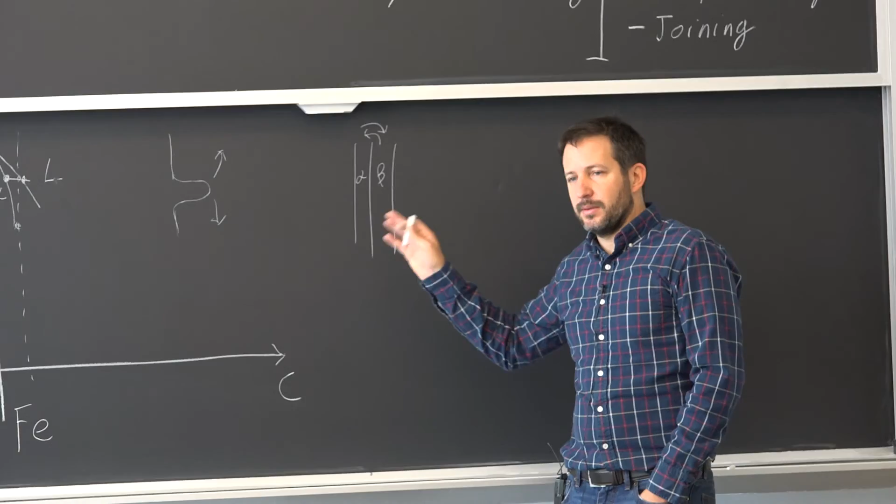Well, the first thing that's going to happen when you heat it up, it does sort of mix in by diffusion a little bit. So everything at higher temperature, we're going to go through that. You get grain growth, you get certain boundaries to disappear, you get your chemical gradient to disappear, because now you have those two phases, and it's not the equilibrium. It's just the way you did it because you did it quickly. If you did it quickly enough, I think it would be the reverse, but we don't do that very often, and we never really go through the process. If you do it slowly, you will probably end up closer to equilibrium before you melt.

It's a very good question. It's a little tough one.

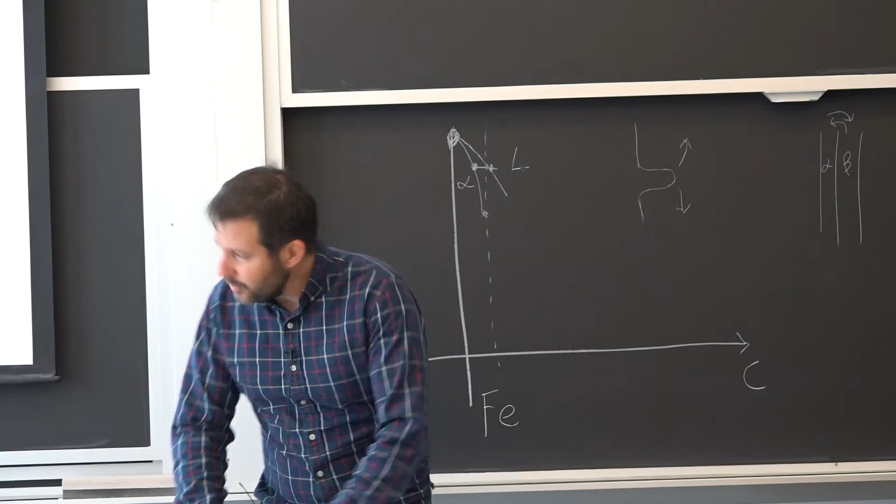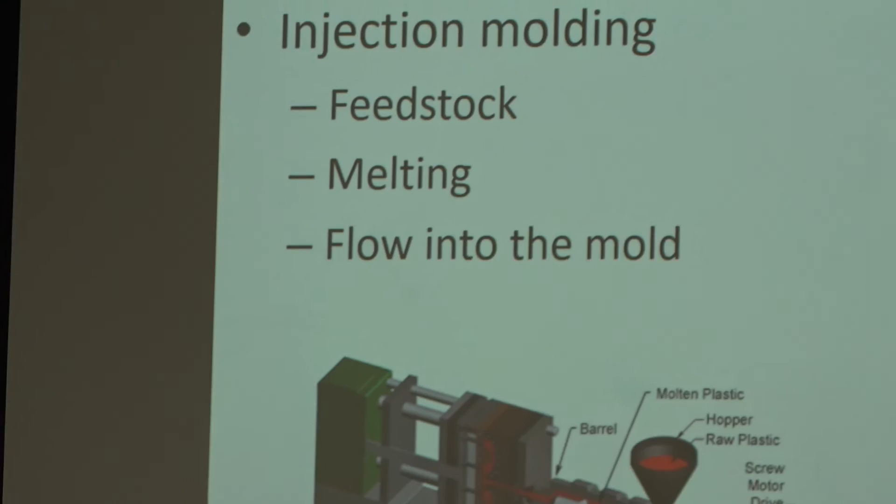All right, plastic. So I'm showing you these little pellets here. A lot of times, if you're making parts like this, you'll start with a feedstock that looks like cat food or something, and you have to heat it up. What I'm showing here is a typical system for injection molding. They don't call it die casting, but it's a similar process where you heat up your plastic and put it into this drive system. It's a screw, so it's heated by, and blended by, shear deformation. This screw, just like a food processor, if you've ever ground beef, that's what happens.

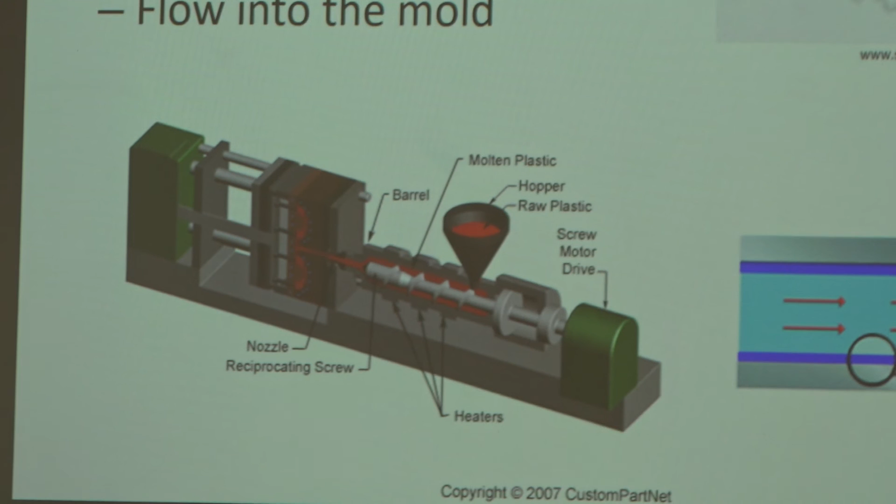Eventually it gets into your mold. The best beauty of this is it's so low temperature. It's so easy to do, so everything happens very quickly. You can make things more quickly. Your mold material is less expensive, and it doesn't wear as much. So we'd love to make everything out of plastic if we could.

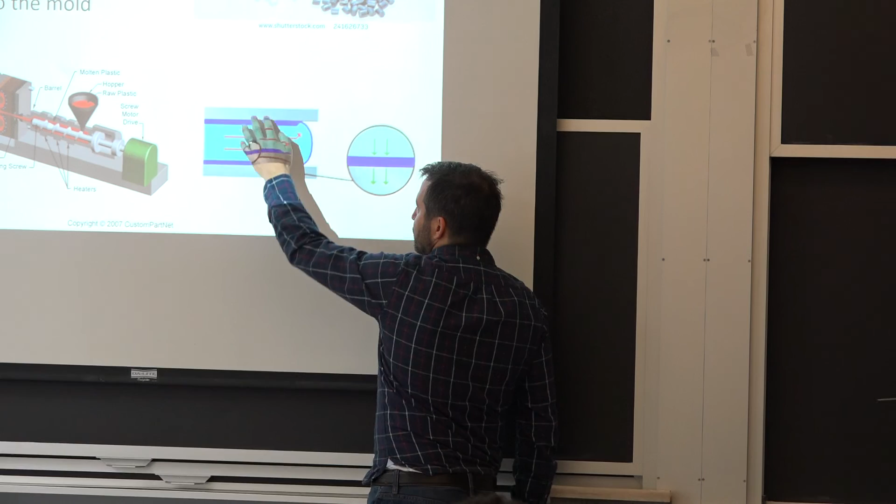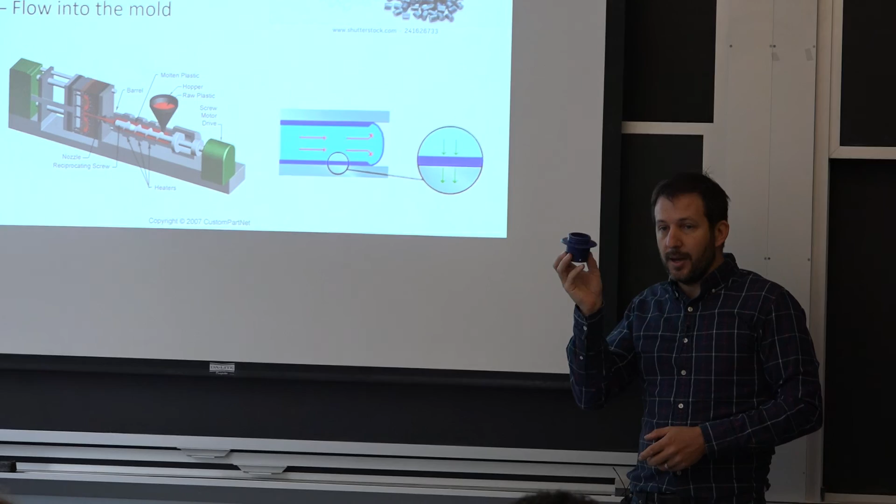So the big, long chains of molecules get oriented here towards the mold, close to the mold surface. It's not exactly like forming grains of crystals. You can probably think of this because everything is so long that you cannot organize a macromolecule spaghetti into something that's very, very organized. It's just not going to happen. But what does happen is when you push it, shear it, and deform it, you form that skin. So if anything you want to bring home for your permanent knowledge base: if I go and start grinding the surface and try to make it polished, it's not going to be as resistant to creep, fatigue, and cracking than just the original material.

Most of the time, the as-molded geometry is more resistant because you form that skin. Now what happens more towards the center is this slide that I skipped. So you form crystallites and spherulites. Did I have the word written down here? No, I can write that one down because it's so important. When you think of polyethylene, polypropylene, nylon, they all have this structure internally, so they are semi-crystalline polymers. Spherulites are about the same size, micrometers in size, and as opposed to metals, you have a lot more of these nuclei forming in the center of the part at the mid-wall.

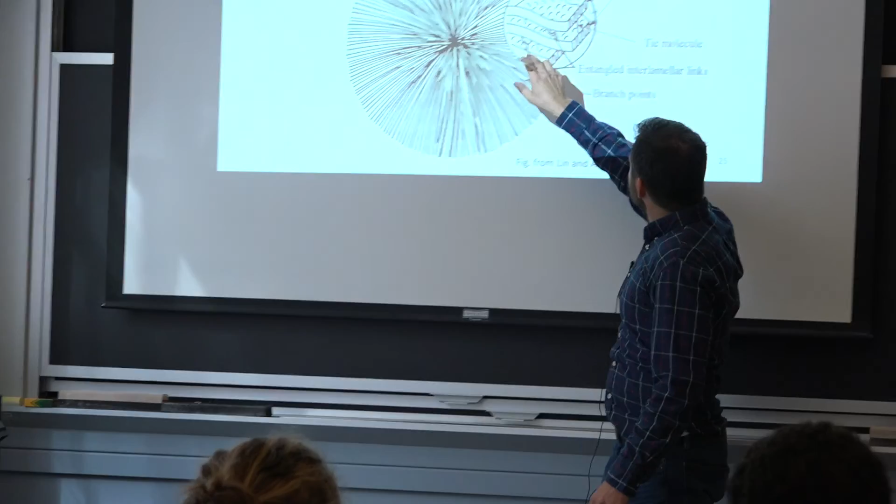What happens is you start from the very center, forming an arrangement, you fold that molecule into a crystal shape, and then it grows from there, and eventually it merges with the next one. So they're just little assemblies, because it's not crystals, there are thousands of crystals in each one. And the idea is a little like we were talking about here, where there are two things: you take what is disorganized and take what you can organize, and that's how you form those crystallites. They have a lot of implications for the quality of a part.

The same way you want to have these fines—I worked on nanocomposites, and what happens there is sometimes if you have your little particle of reinforcement that acts as a catalyst for forming these things, then you can control the size of your spherulite that way. Each little particle becomes a point of initiation. If it's a nano clay material, it may grow in one direction and form a lamellar structure as opposed to forming a sphere. So there are many implications for how things start from the melt to having a solid.